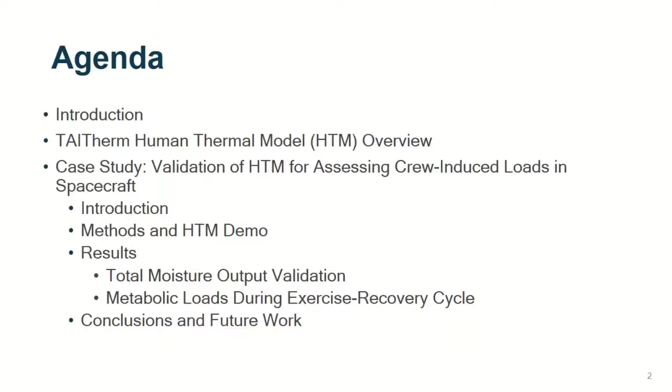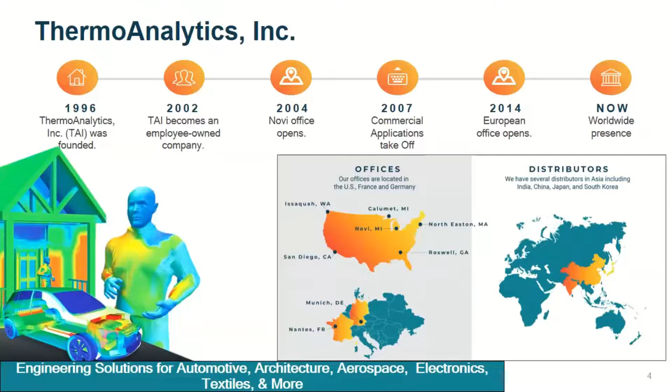So ThermoAnalytics, we are a software company that provides engineering software and services for many industries, such as automotive, architecture, aerospace, electronics, and textiles. Our main office is in Calumet, Michigan, in the Upper Peninsula of Michigan, and our second largest office is in the Detroit area, and we also have distributors in Asia and a few small offices in Europe.

We offer a CAE toolbox consisting of two main software: TAITherm, which is a three-dimensional heat transfer solver, and we have extensions available to model batteries, exhaust, drive cycles, and human thermal physiology and comfort, which is what I'm presenting on today. We also offer CoTherm automation software that allows to automate multiple TAITherm runs and couple them with user-written Python routines, and or couple with 3D CFD software or 1D system simulation tools.

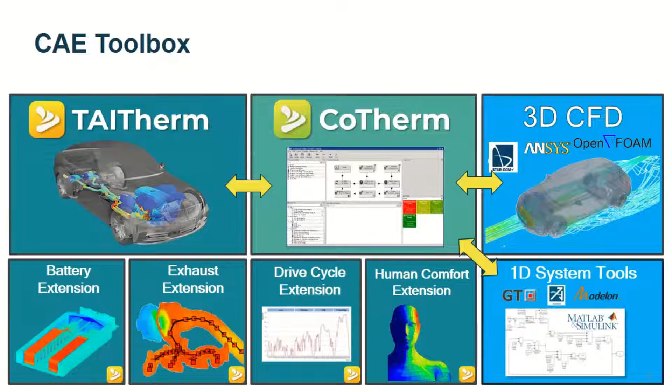So now I will describe our human thermal model. Many of the historical thermoregulation models, such as the Wissler and 41 node man, also known as MetMan, that are used by NASA are based on treating the human body as a set of cylinders, as shown in the pictures here. ThermoAnalytics has developed a human model that uses more elements and layers than these historical models, and it's been validated with human subject and sweating mannequin tests, and also allows for local sensation and comfort predictions.

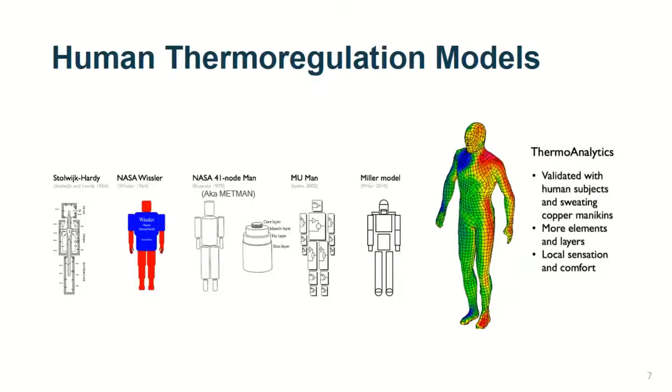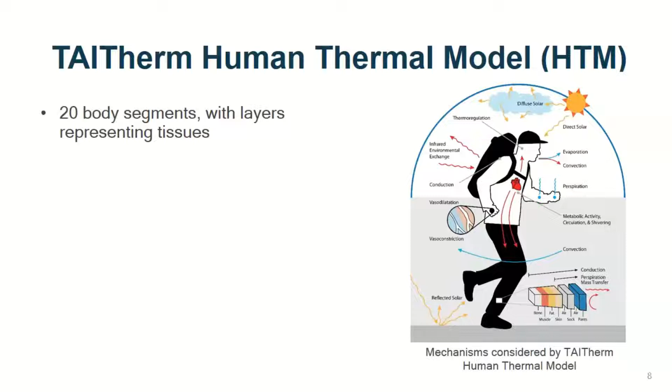So our model consists of 20 body segments with layers representing tissues, such as the bone, muscle, fat, and skin. And note that while these 20 segments are what we use to calculate the physiological behavior, there can be multiple geometrical elements within each body segment, so that provides a high-resolution thermal solution. The model solves the bioheat transfer equation shown here.

This equation consists of the thermal diffusion equation with the effects of the metabolism, environment, and blood perfusion considered through the imposed heat rate terms on the right-hand side. And these heat rate terms can vary significantly over time, depending on the human's thermoregulatory state. The metabolic heat rate considers the temperature effects on the metabolism, the heat due to shivering and due to physical activity. The environmental term considers the sensible and latent heat exchange with the environment.

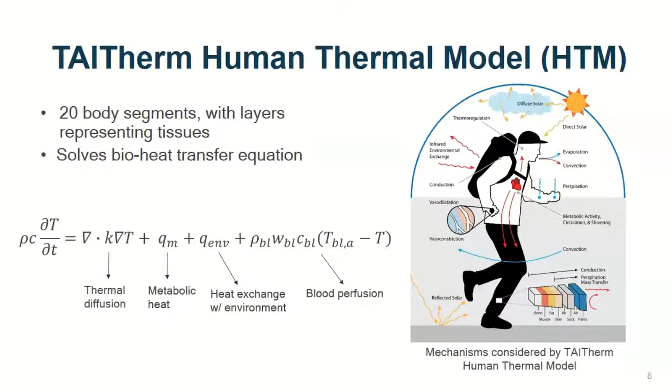And then the far right blood perfusion term considers the heat transfer due to the flow of blood, where the values of the coefficients in the front are determined from empirical models developed by Fiala and Wissler. The right-hand side terms of the bioheat transfer equation are calculated by considering both local regulation mechanisms, such as the Q10 effect on the metabolism, sweating, and blood flow,

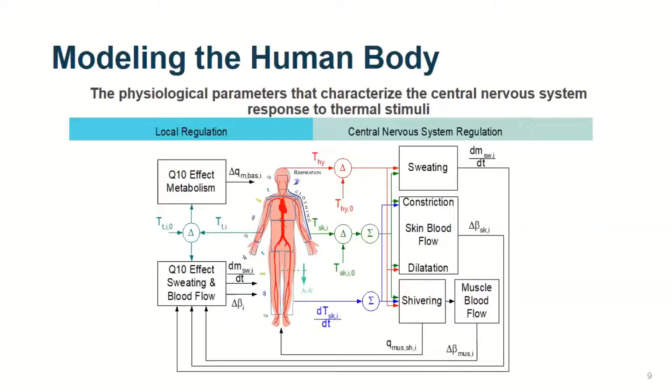where Q10 effect refers to a power law equation that describes how a physiological mechanism changes with each 10 degrees Celsius change in temperature. And in addition to the local regulation effects shown on the left here, the model also considers central nervous system regulation mechanisms and their interactions, like shown in the right.

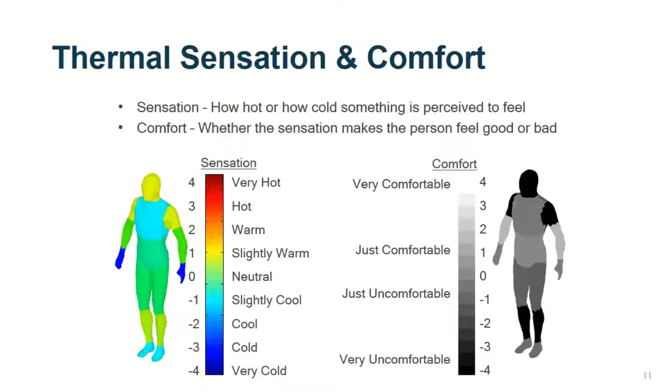Sensation and comfort is not always directly correlated. For example, a sensation may feel cool, but could be comfortable if the body is hot, such as going swimming in a cool lake on a hot day. So with the 20 body segments of the human model, we can predict how local asymmetries can impact the overall sensation and comfort.

Also, different body sizes in terms of population percentiles can be chosen, or you can specify very custom physiologies with custom mechanisms through a text file.

TAITherm will also consider the environmental effects on the system, such as the solar loading, the radiation exchange with the sky, and wind convection by using boundary conditions specified in a weather file. So you can model a human in an outdoor environment with asymmetric solar radiation on the body, or some enclosed environment like in a vehicle cabin.

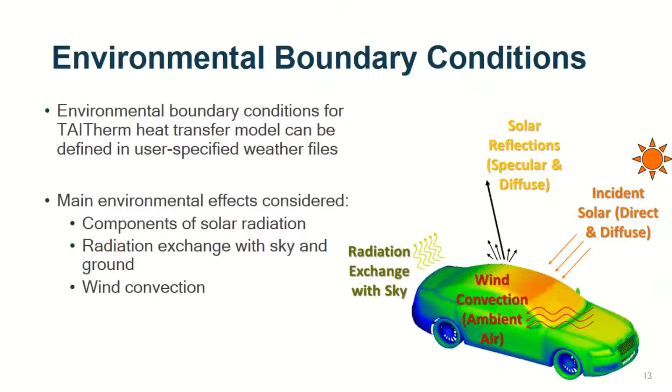For clothing, we have a clothing materials database that's integrated into TAITherm. It has a lot of pre-specified clothing properties, or you can add your own clothing materials and define its parameters, like the thermal and evaporative resistance, a clothing area factor, which accounts for the fact that the clothing isn't skin tight and will have folds, so it will increase the surface area for radiation exchange, and the heat capacity.

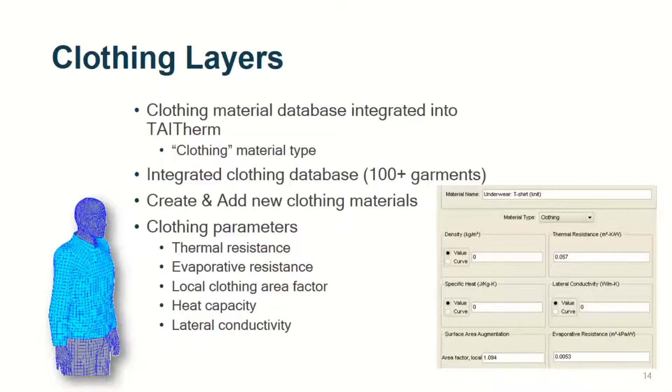Many existing human models use a basic clothing model where evaporative heat loss is assumed only to occur at the skin and is computed based on the bulk evaporative resistance of a layered clothing stack, like shown in the figure. And in these models, the layer-to-layer transport of vapor within the clothing layers is not considered, and the humidity within the clothing layer is not known.

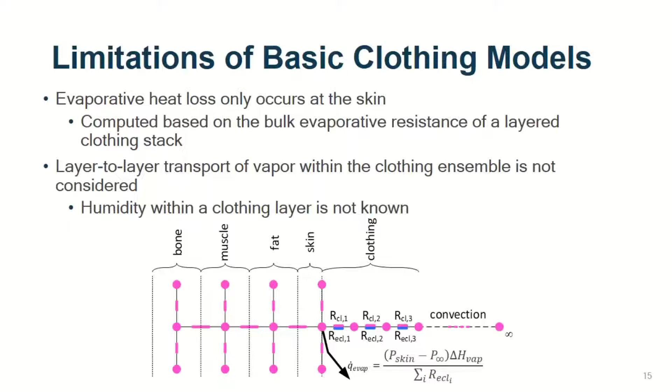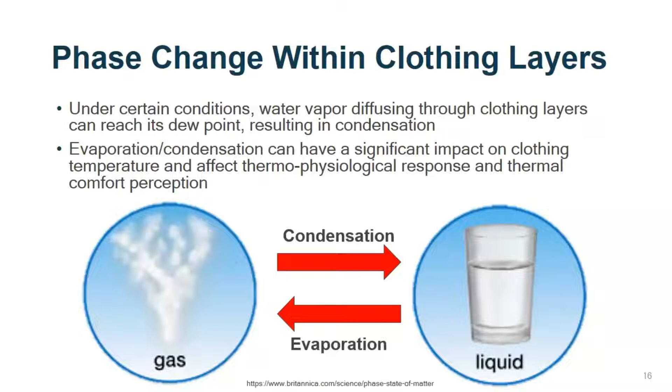And this can be a problem because in certain conditions, water vapor diffusion through the clothing layers could reach its dew point, resulting in condensation. And then that condensed liquid could evaporate at a later time from that layer. And these evaporation and condensation phase changes could have a significant impact on the clothing temperature and affect the thermophysiological response and thermal comfort perception.

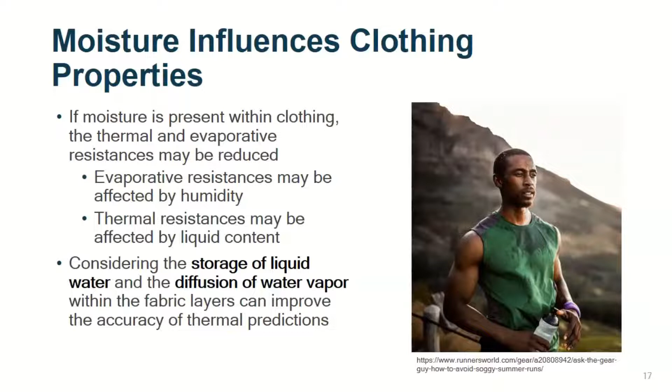Additionally, if moisture is present within the clothing, the thermal and evaporative resistances may be reduced. Evaporative resistances are often affected by humidity, and thermal resistances are affected by liquid content or sweat. So considering the storage of liquid water or sweat and the diffusion of the water vapor within the fabric layers can improve the accuracy of the thermal predictions.

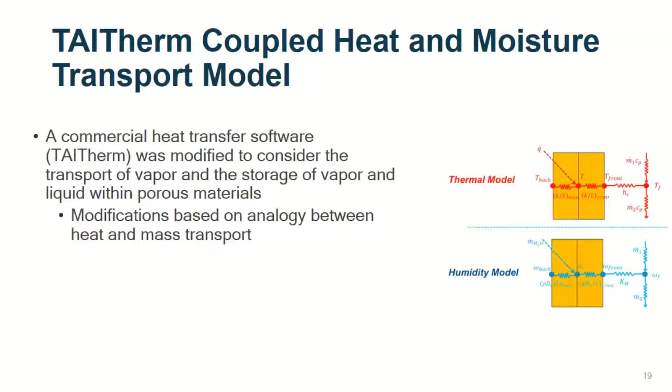So in order to address these limitations, we developed a coupled heat and moisture transport model, where we modified our heat transfer software to consider the transport of vapor and storage of vapor within porous materials such as clothing. And we did this based on the analogy between heat and mass transport,

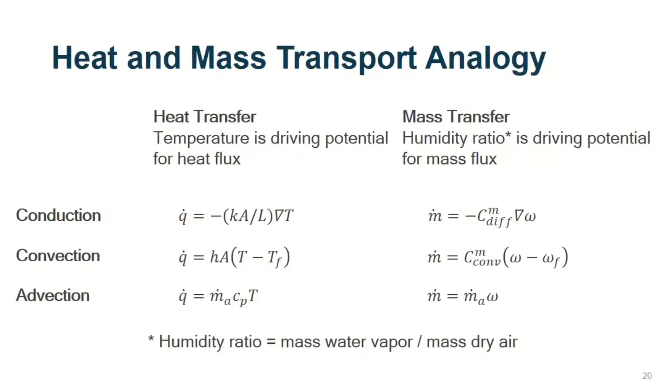where for the three modes of heat transfer, conduction, convection, and advection, where temperature is the driving potential for a heat flux, we can write analogous equations for mass transfer, where instead of temperature, now the humidity ratio is the driving potential for the mass flux. And humidity ratio is defined as the mass of water vapor to the mass of dry air ratio.

So by using this analogy, the model equations can be written as expressions of conservation of mass and energy on each control volume of the finite volume simulation. So for mass, the net mass moving in and out of the control volume can be described in terms of the mass that moves due to diffusion, which is the first term, plus the mass that moves due to convection, plus any imposed mass, which is being added or removed from the volume by other mechanisms, like active sweating.

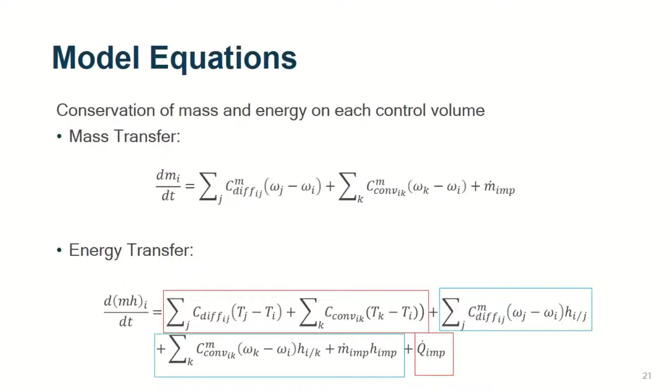And in a similar concept, we can write down the energy transfer equation, where we consider both the regular heat transfer and the additional energy transfer due to the energy of the moisture entering or leaving the volume, or the moisture undergoing the phase changes.

So we combine this moisture model with the human thermal model by adding moisture nodes to the outer skin and clothing layers for modeling moisture transport. So for each clothing layer, we consider the thermal and evaporative resistances. And then to consider sweating, the model computes a sweat rate based on the physiology and imposes that sweat on the skin layer. And then we track the evaporation of the sweat and movement of the humidity through the other clothing layers. And more details about the moisture model are described in our last year's ICES paper, referenced below.

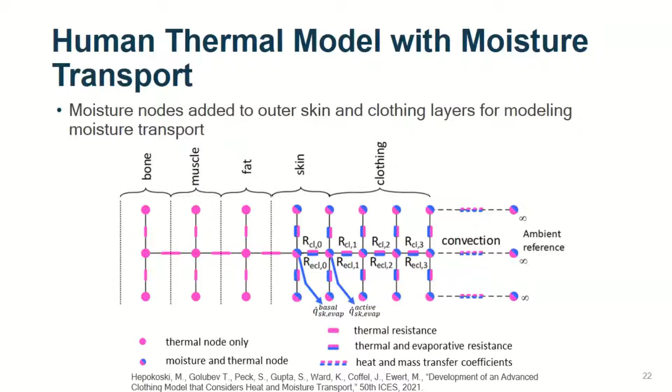We did several validations of this model for clothing and moisture modeling. One was looking at the impact of phase change, where we compared the model's predictions to measurements that were derived from sweating hot plate experiments. And in these experiments, we looked at a clothing stack made of 3 layers, a Gore-Tex material, a polyester batting insulation layer, and Capilene, which is a fabric made by Patagonia.

And to control the physical effects that we're looking at, we separated these fabrics by special films. They're called MVTR films that allow the passage of water vapor, but block the diffusion of liquid water between the clothing layers. And then we sewed in thermocouples, which are these small red ovals, between each of the layers to measure the temperature. This test was done under cool, humid conditions that promote condensation within the clothing.

And for the validation, we first fitted the model properties for the dry case as best we could, shown in the plot here. And then we allowed the model to predict the fabric temperatures under the wet hot plate case. And we see that the model was able to predict the locations of phase change and the relative temperature changes

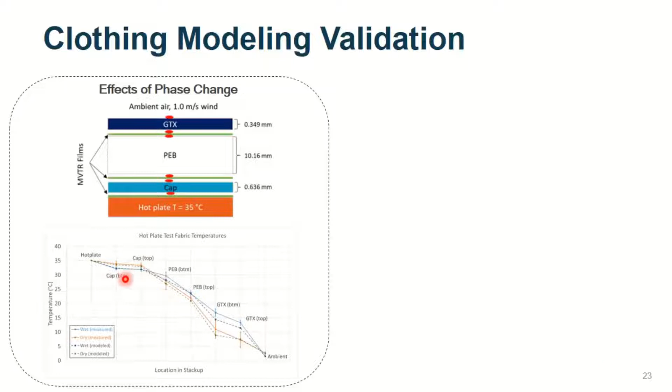In another validation, we looked at the impact of liquid accumulation, where we used this 3-layer fabric stack of fleece sandwiched between taffeta. And again, we separated these layers with films that allow passage of vapor but prevent liquid diffusion between the layers. And we ran this test for 1000 minutes in order to induce enough liquid accumulation in the fleece, which would cause a measurable transient in its thermal resistance.

And then for the results, we measured 2 main quantities: the total weight gain due to the liquid accumulation in each fabric layer at the end of the experiments, which is shown in the table here. And we see we are within the error bars of the measurements for the Taitherm prediction. And the other quantity we looked at was the transient hot plate heat flux that was needed to maintain a constant 40 degrees Celsius hot plate temperature.

So since the condensation-induced liquid accumulation causes a gradually decreasing fabric thermal resistance, this results in an increase in heat loss over time. So the hot plate needs more power over time to maintain a constant temperature. And that's a way we can measure indirectly the decrease in fabric thermal resistance. So here we also see a good agreement between the modeled and measured results, showing that the model was able to describe this liquid-dependent thermal resistance over time.

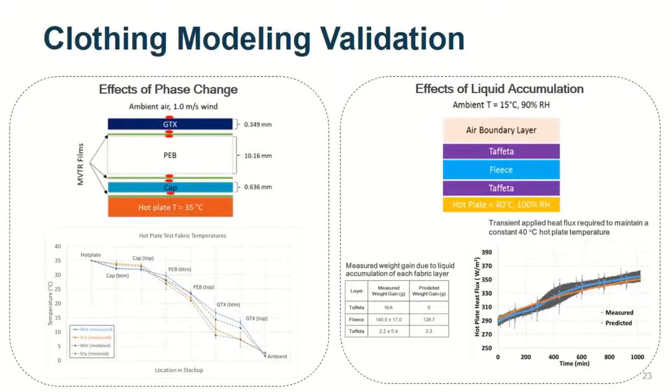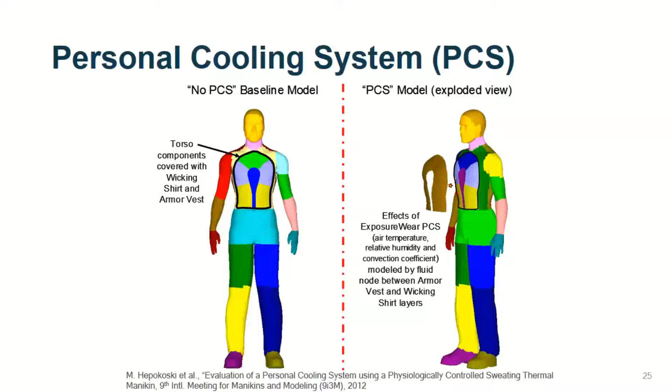A few example applications of the model that we worked on. One was evaluating the performance of a personal cooling system. And so this was a cooling vest that is supposed to help cool a human. It was actually interesting that the initial design of the vest was not very good, and the simulation showed that the cooling system was causing a higher skin and core temperature than without the vest, because the vest limited evaporative and convective cooling too much. So then the simulation was used to improve the vest design.

Another space-related application was this mechanical counter-pressure suit study, which helped optimize the suit thermal subsystem for Mars EVA, planetary exploration. So the weather on Mars was specified as a boundary condition in Taitherm, and then Taitherm was used to design the suit to enable some evaporative cooling, and it was found that even enabling some small amount of evaporative cooling through the suit wall could be sufficient to prevent heat exhaustion.

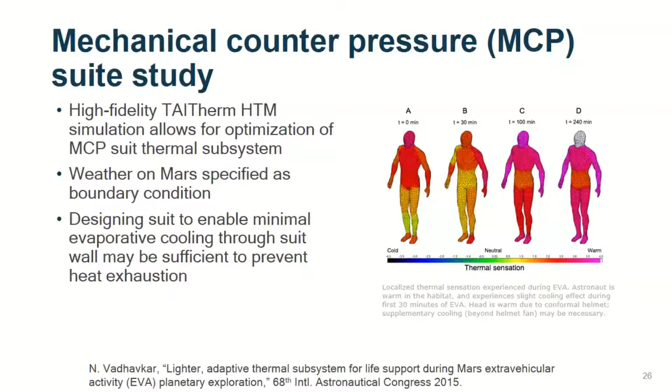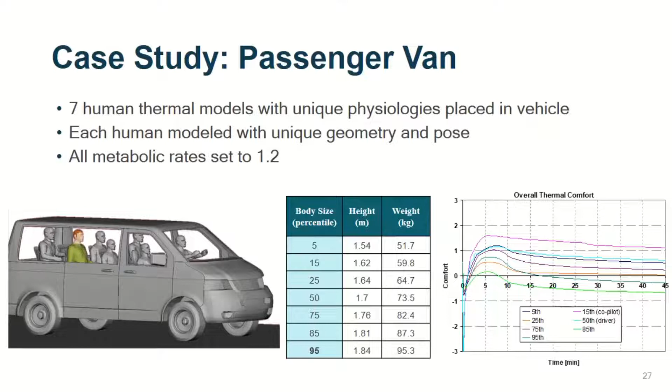Also, we've done a lot of work with vehicle modeling, such as you can put multiple humans in a vehicle with unique physiologies, different body sizes, heights, and weights, and then look at their overall thermal comfort and sensation and optimize the HVAC system in the vehicle.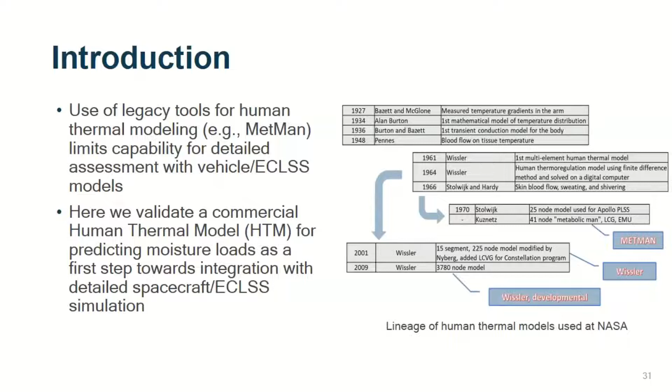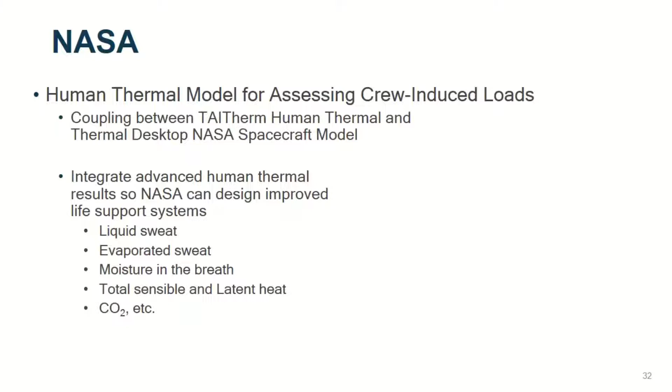So we validated our human thermal model for predicting moisture loads as the first step towards integrating the model with spacecraft and ECLS simulation. And this is part of an ongoing effort funded by NASA for coupling the human thermal model and Thermal Desktop spacecraft models, which will allow to integrate the advanced human thermal results so NASA can design improved life support systems.

So for the validation, we used data from 2018 when NASA performed exercise tests to study the moisture loads on the Orion ECLS system. And those tests were used by a group at NASA to improve the MetMan model sweat calculations. In these tests, 30 human subjects were each performing 30 minutes of continuous rowing at 75% aerobic capacity, followed by a 30-minute recovery period.

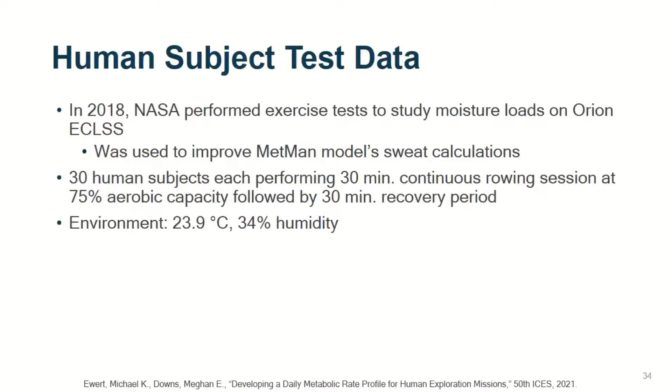And the environment was around 24 Celsius and 34% humidity. And then the sweat data was obtained by measuring the nude body weights prior to the test, at the end of exercise, and at the end of the recovery period. And the clothing weight was taken before the exercise and at the end of exercise.

And also the subjects changed clothes at the end of the exercise. And this test was reported on by Mike Ewert and co-authors at last year's ICES presentation.

So for the Taitherm model setup, we specified the boundary conditions reported in the NASA experiments. So the clothing that the subjects were wearing were a t-shirt, shorts, and socks with clothing properties shown here. And note that we also consider the additional clothing insulation that's gained due to the clothing not being skin tight and having folds through this surface area augmentation factor.

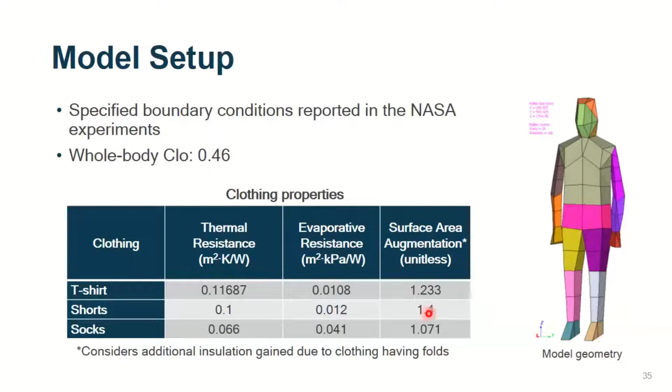We also specify the metabolic equivalent of task, or MET rate, as an input. That represents the activity portion of the whole body metabolism for a 50th percentile male, and then Taitherm will automatically scale the metabolism to match the anthropometry.

So to do this, we benchmarked the activity level for the reference NASA handbook-sized individual, and then scaled the anthropometry in Taitherm to represent the 5th, 25th, 50th, and 90th percentile males to represent different populations of astronauts. So that ended up being 8.42 MET for exercise and 1.2 for recovery.

To model the clothing change that occurs, we removed the liquid sweat that's accumulated in the clothing from the skin and assumed that a maximum of 35 grams per meter squared of sweat remains on the skin. And that's based on a paper by Fiala, which is the maximum capacity of the skin to hold sweat. This is a conservative assumption for modeling the ECLSS loads, since it represents a worst case scenario because it would result in more evaporation than if less sweat was left on the skin.

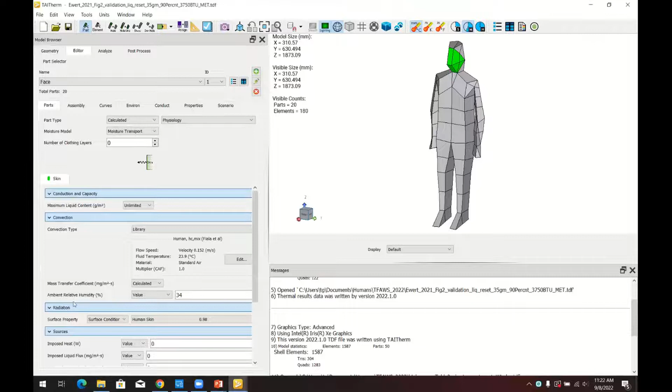Okay. So now you should see the Taitherm interface. This was the model we used for this study. So we have the relatively coarse human body model here. We decided to use a coarse one because it allowed us to do more comprehensive simulations quickly. It runs in a few minutes, which was convenient for this study.

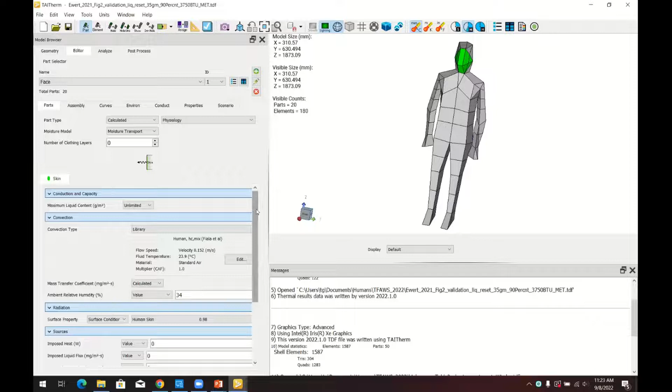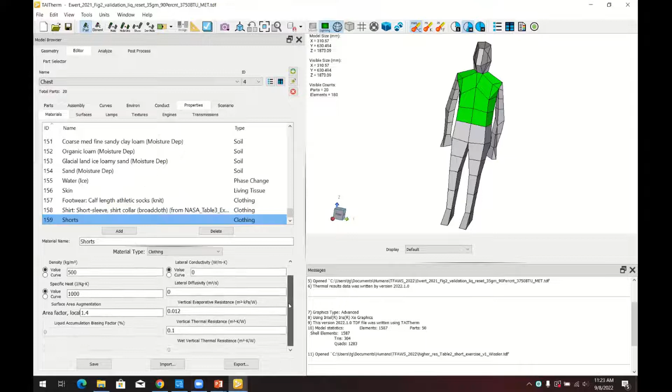So for each of the body parts here, we were able to specify the clothing. So first in the clothing properties, we define some clothing material properties such as the shirt and the shorts. So we provide the thermal properties here and also the evaporative and thermal resistance of each layer. And then we can specify the layers here and the thickness of the clothing layers. All of the body part internals of the human body modeling is done in the background for you, so you don't have to worry about specifying that yourself.

And then for convection, we typically use a library of empirical convection equations based on Fiala's work, which can be selected here, and you just select the fluid temperature of the environment and the flow speed of the air. We then specified the surface properties for the radiation, so the emissivity of the surfaces, and then we can add in any additional imposed heat, liquid flux, or vapor flux that could be occurring.

So say if the human was wearing some kind of wearable device, like a watch that maybe was heating his arm, you could add an imposed heat, a value, or a curve that models that, or if there was some water dripping on the human, you could add that as a liquid flux. And then we specify our initialization conditions.

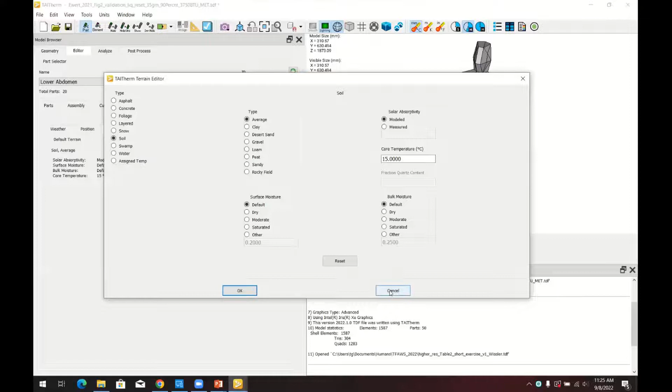Then for the environment, in this case, we're modeling the human in a spacecraft, so it's what we call a bounding box, or just a room with a constant temperature, but you can also use a natural weather environment and select a weather file, and then there are options for the background ground modeling, so different types of background soil or concrete where the human might be located. This is more relevant for Earth applications. And then selection of wind model, and there are also options for how to model the sky radiance. And the solar radiance can be either modeled by TAITherm, or you can specify measured solar irradiance values.

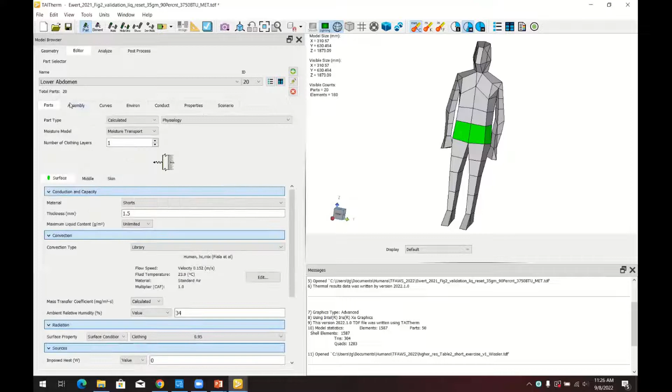So then finally, this human is defined as an assembly. You can have multiple humans, which you would define as multiple assemblies, and you could put them in other geometry like a spacecraft or a vehicle. And we defined an activity curve here, which was the metabolic activity based on the human subject tests. As I mentioned, it consisted of a 15-minute rest period and then a high-intensity exercise period followed by a rest period.

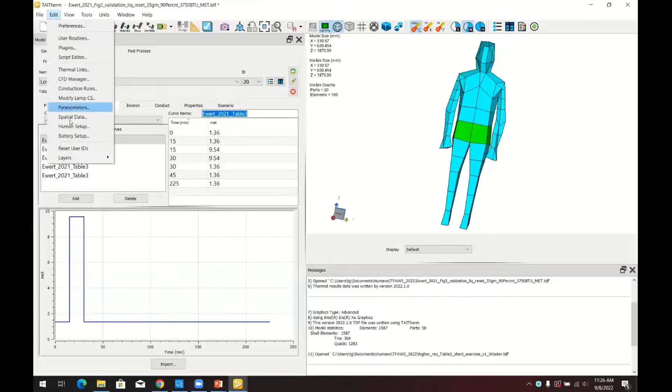Finally, there is the human setup dialog, and there's a few accompanying text files that allow you to specify custom physiology properties. So for example, here I'm modeling a 90th percentile human by specifying some details in the text file, and the human model configuration, which gives you different options for how to model the physiology.

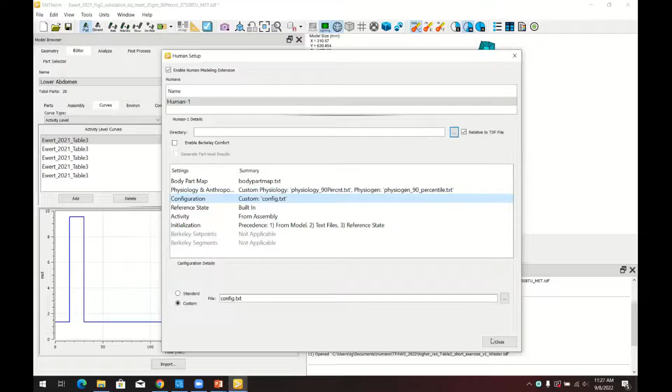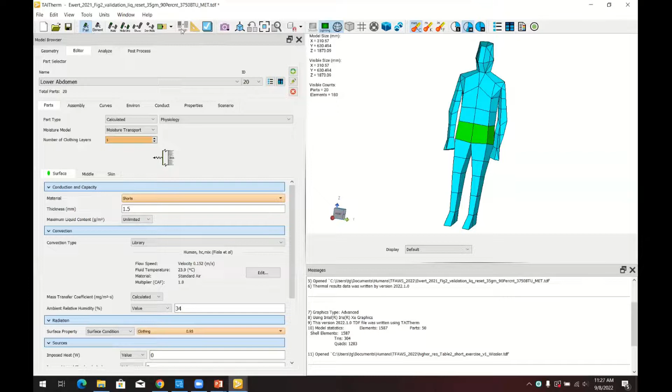So what's nice about this model, I think, is the user friendliness in setting it up through the GUI, versus some other models that require you to modify code or purely use text files. So I just wanted to show that briefly. And now I'll go back to the slides.

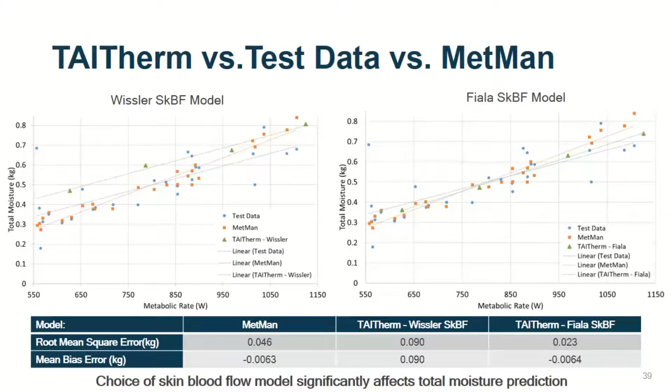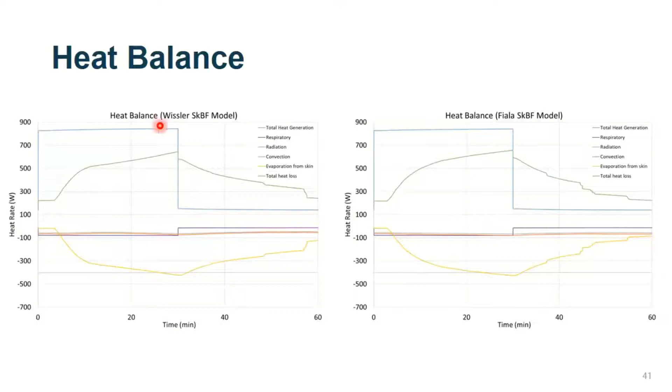The other validation we did was looking at the metabolic loads during the exercise recovery cycle. So these plots show the heat rates in the human body predicted by TAITherm with the two skin blood flow models. So here we clearly see the 30 minutes of exercise followed by the 30 minutes of recovery with the blue line, which is the total heat generation curve.

And if you look at the green lines, we see that when we use the Wissler skin blood flow model, we predicted a higher total heat loss than with the Fiala model, mainly during this recovery period. And much of that heat loss comes from the evaporation of sweat from the skin, which we see if we compare the yellow lines. And a few other comments about these plots.

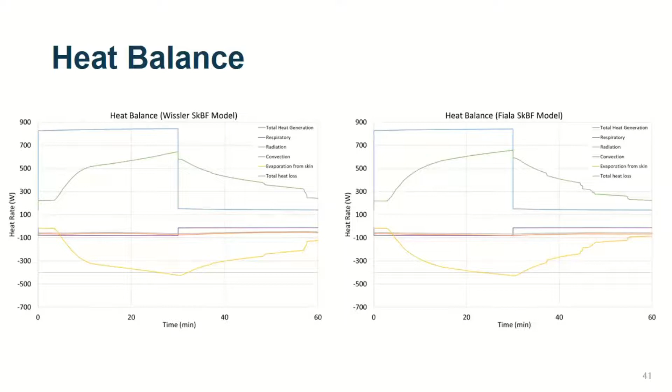The flat regions you see in the beginning here are due to a delay in the onset of sweating in the model, and the slight rising of the heat generation during the exercise portion is due to the physiological changes that occur as the body becomes warmer during exercise. And then we have these sharp drops in the evaporation heat loss, and those occur when all of the liquid sweat is evaporated from a particular body part. So it's an effect of the geometry being discrete.

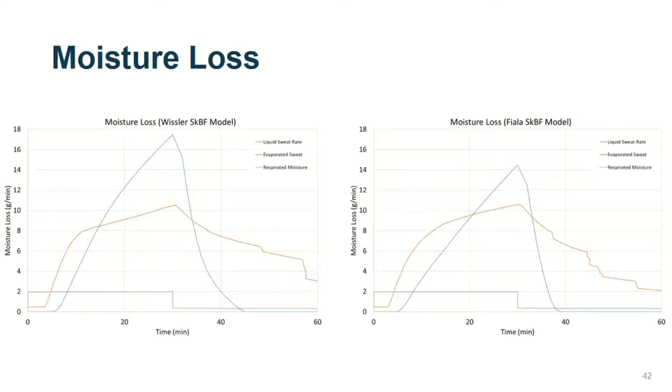The next plots show the moisture loss for both skin blood flow models. And again, we see higher moisture loss with the Wissler model than Fiala, which is consistent with the higher heat loss that we saw in the previous slide's plots, and also with the total moisture loss results that we saw. So to investigate the source of these differences between the moisture loss predictions with the two different physiological skin blood flow models, we plot a few more quantities here.

Starting at the top left, we see that the Fiala model predicts a higher skin blood flow rate. And if you look at the next two plots, we see that this caused a lower hypothalamus temperature and higher skin temperatures, since the body's core is being more effectively cooled by the higher blood flow rate of the blood transferring heat towards the skin.

Since the sweat model relies on a sweat signal that's calculated from the skin and hypothalamus temperature, with hypothalamus being the dominant factor, the temperature differences we see here impact the sweat signal of the two models. So with the lower hypothalamus temperature in the Fiala model, we also see a lower sweat signal, so less sweating of the human in that model.

And then the higher sweat signal that we saw with Wissler will cause a higher skin wettedness, where skin wettedness is just the ratio of the evaporation that occurs to the maximum possible evaporation that could occur if 100% of the skin was covered with sweat.

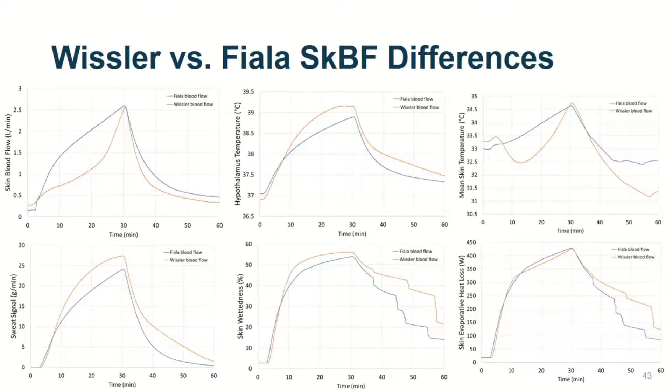And one thing to note is the only reason we're able to see, for example, higher skin evaporation during the recovery period is because the model is tracking the liquid accumulation that occurs during exercise and then able to see how that liquid evaporates during the recovery period. A lot of clothing models, such as the ASHRAE model, will only assume that evaporation is occurring if there is some active sweating, and will not track what happens to the liquid sweat after the person stops exercising.

Finally, we compared the Taitherm results with the MetMan simulation from Mike Ewert's and co-authors' paper from last year's ICES conference. And we find that using Taitherm with the Fiala skin blood flow model gave results that were closer to the MetMan results than using the Wissler model.

The Fiala model predicted a higher sensible heat loss than Wissler, and this was likely due to its higher mean skin temperatures. We also saw that the latent heat results for Fiala and Wissler are actually very close during the exercise portion, but start to differ during the recovery portion, where we have higher latent heat loss by Wissler, as I mentioned before, that's caused by the higher liquid accumulation and sweating that is seen.

The water vapor output behavior is exactly the same as latent heat, since it's directly related to the latent heat through the enthalpy of vaporization. And then both Taitherm models predict lower latent heat and water vapor output than MetMan during the exercise portion. And that difference could be due to different assumptions about the clothing evaporative resistances or the convection coefficients between the Taitherm model and the MetMan model.

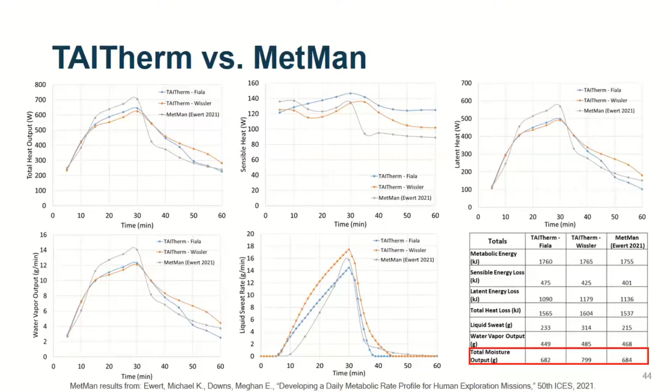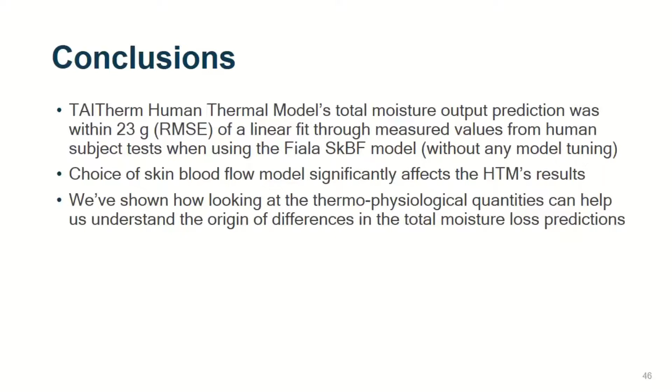So for conclusions of this study, we saw that the model's total moisture output prediction was within 23 grams of a linear fit through measured values from the human subject tests when we used the Fiala skin blood flow model without any model tuning. And we saw that the choice of the skin blood flow model significantly affects the HTM's results, and showed how looking at the thermophysiological quantities can help us understand the origins of some differences in total moisture loss predictions.

For our ongoing and future work, we're working on a phase 2 NASA SBIR for co-simulation for assessments of crew-induced loads and ECLSS systems. So this human thermal model that I described here is being coupled with Thermal Desktop, and Thermal Desktop will be computing the heat transfer between the spacecraft exterior and the Earth and Sun and outer space. And then Taitherm will be computing the details of the human thermal physiology and predicting the crew-induced loads.

And we're developing coupling applications to allow for easily coupling these two softwares and allow for integrated analysis of things like CO2 levels, body core temperature, humidity, the heat transfer, and the induced loads to help design the ECLSS system.

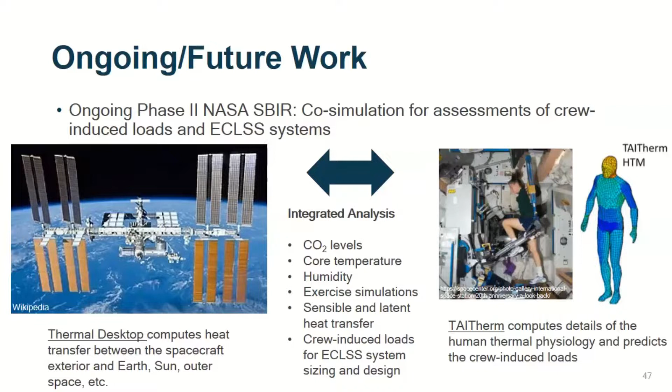Thank you, Timofey. That was fascinating. There are a few questions. Actually, I submitted some questions in the chat, and I would encourage anybody else in the audience to please submit the question. But Timofey, if you click on the chat, that will open up and you can see the questions. Okay.

I think you did discuss this, but my first question was: does the model account for cooling due to blood circulation? So if you wouldn't mind talking a little bit more about that and how you model that and how you maybe anchored that model and how that affects the cooling. Because my understanding of cooling in the body is that the blood circulation helps cool the body, perhaps by transporting energy away from hotter sections of the body to cooler sections of the body.

Yes. So we have a blood flow model. There's actually 2 blood flow models. I was mostly here focusing on the differences between the skin blood flow models that we use from Wissler and Fiala. We also have an intersegment blood flow model, which there's also a choice between Wissler and Fiala. Those were the 2 main physiology experts in the field and in the literature that developed models.